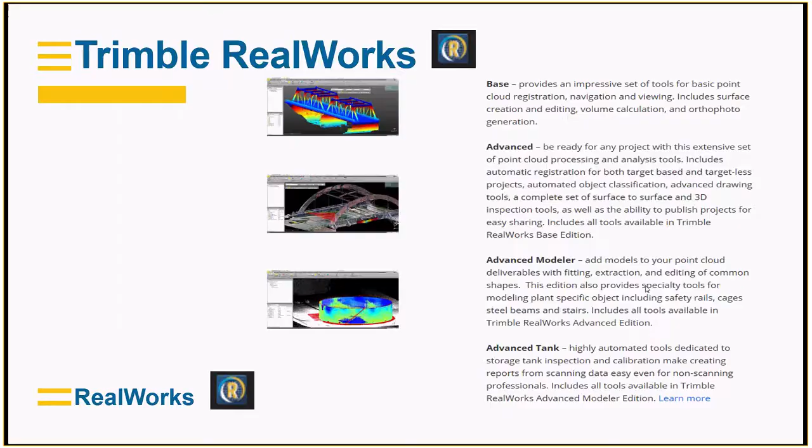So we'll jump straight into it and get into RealWorks. Some of you that were with us on the previous sessions will be familiar with this - this is the start page that we get when we launch RealWorks. It automatically puts us in this registration configuration, which is the stuff we went through the other day.

So today we're going to look at production mode, and some of the stuff we can do in here in the time allotted - we'll just touch on a couple of them and dig a little deeper into some of the different tabs we have available to us here.

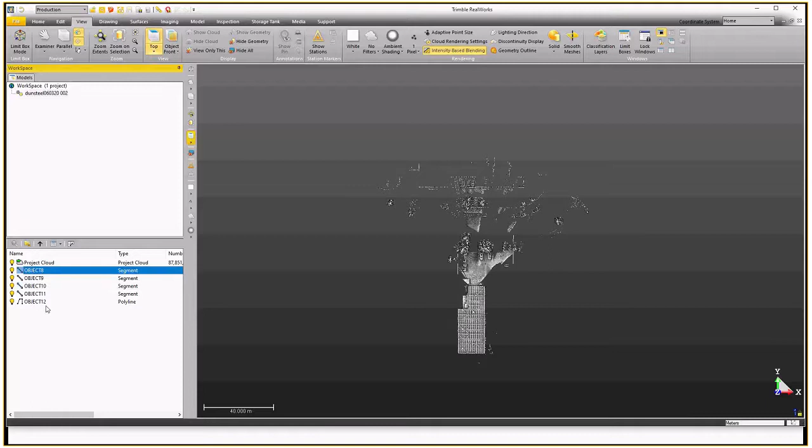So I'll just open up a project here, and I'm just going to delete these.

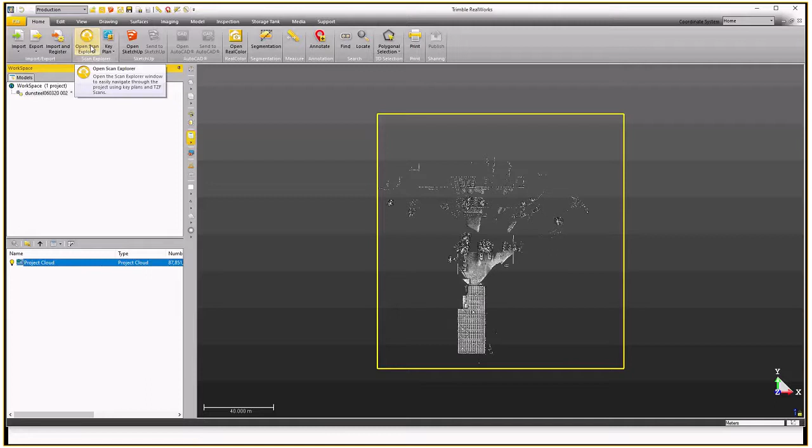So in this Home tab here, we import our data obviously. Moving across from left to right, we have this Open Scan Explorer, which is a plugin for Trimble RealWorks that's very handy for extracting some of the deliverables we've been talking about. When we open Scan Explorer, it takes us into this station view with an image overlaid on our point cloud.

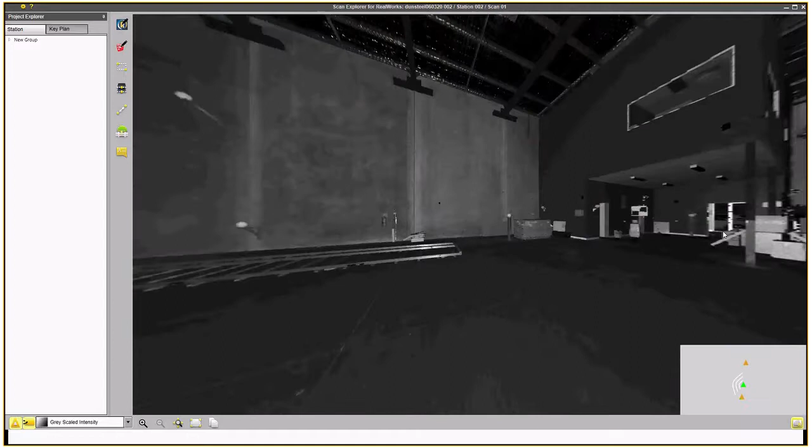We can skip between stations, a familiar workflow that we've seen in TBC as well. There are a few differences in here though - these are all our stations. In here we can create entities, line work and models and the like into RealWorks. We can also create them into SketchUp. The rest of these tools are more for extracting data from the cloud, but these top 2 we'll just have a quick look at today.

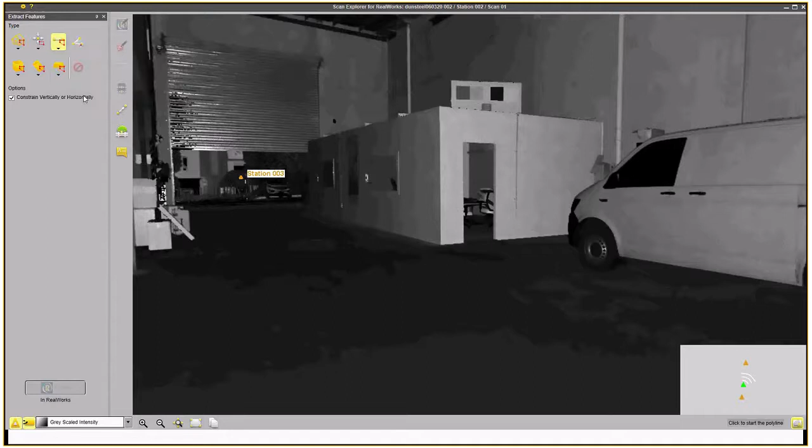So in RealWorks firstly, we have all these different tools available to extract different objects. One of them is this edge extraction. If I select that and then simply pull a polygon around the edge of a particular room in this case, and create, it'll automatically create the line work for me.

If I jump back into RealWorks, the line work's automatically put back in here for you. So I can extract the roof and the floor and all the rest of it, and export that line work into CAD and tidy it up accordingly, extending and trimming all my line work that way.

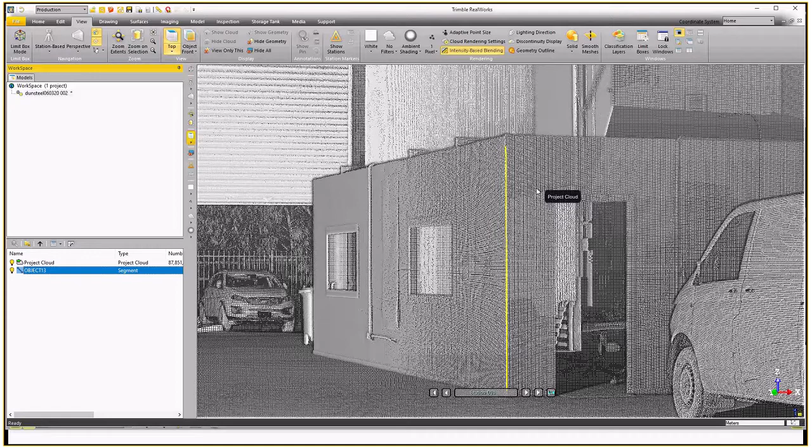Back into Scan Explorer, we can do some others here if we wanted to, and so on and so forth.

We have some other tools available here for creating points and also just basic polyline drawing tools. We also have some basic modelling tools in here, which I'll have a closer look at when we go over into the SketchUp entities mode.

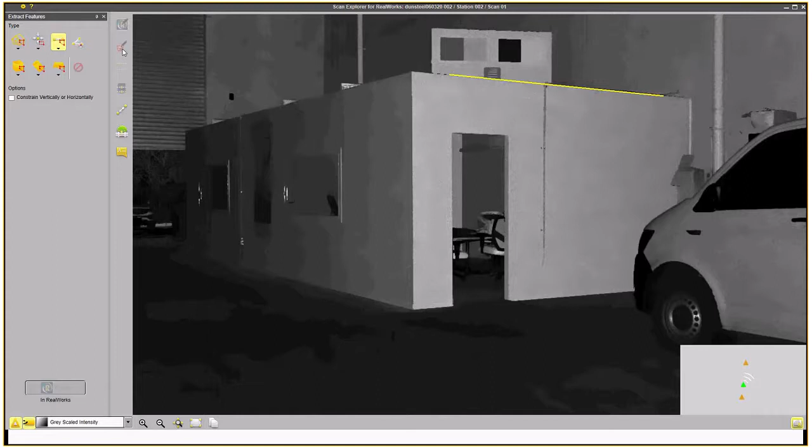So I'll jump over into there now. If I click on this SketchUp icon here - you'll just have to bear with me because of how this is presenting on my screen, I haven't got all my icons available to me. So I should have SketchUp - there it is.

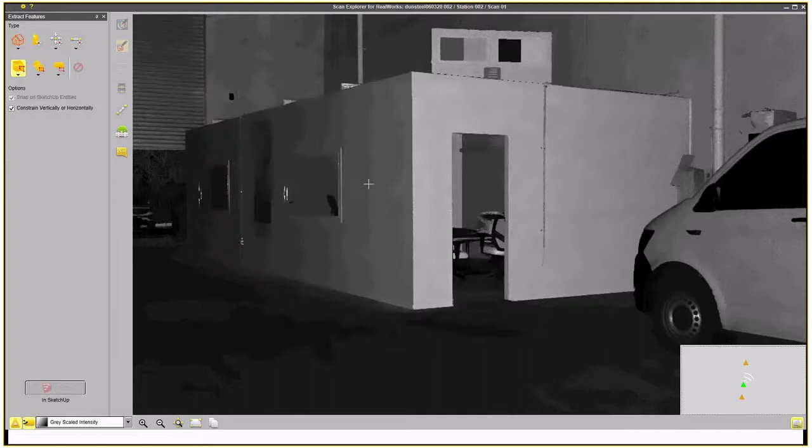And so it'll take us into SketchUp. This is the new scan extension tools up the top here, which I haven't had much opportunity to play with as yet, but I'll come back into here.

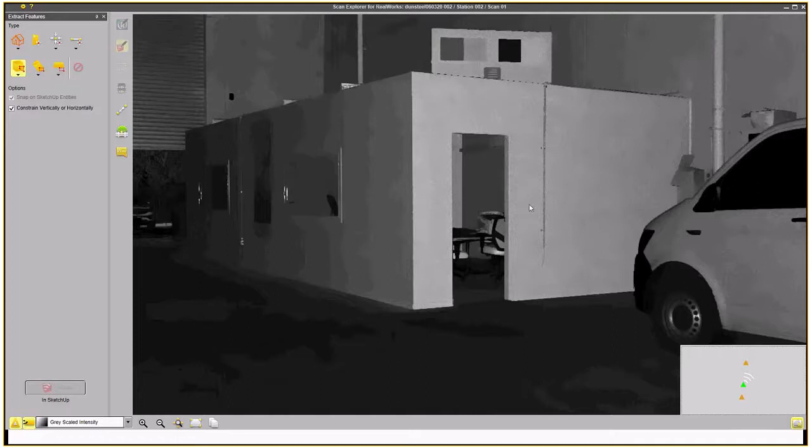So if we wanted to extract features into SketchUp, one of the nice tools in here that wasn't in the RealWorks workflow is this one: walls using 2 face points. We can pretty quickly model this warehouse using this tool, do a basic modelling. If I select the floor and the roof and then simply click around the walls of the building - I can't see that wall, so I'll just have to step up to station 3 and keep going.

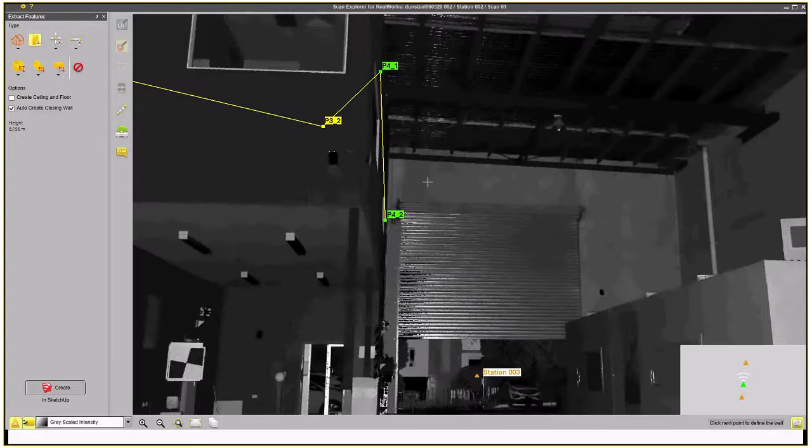And I'll come back to station 2, it's a bit easier to see. And keep going like so. Okay, so if I create on that now, and I'll go back to my SketchUp.

Okay, we now have our warehouse model without the roof and the floor. There is an option to add them to the model in SketchUp.

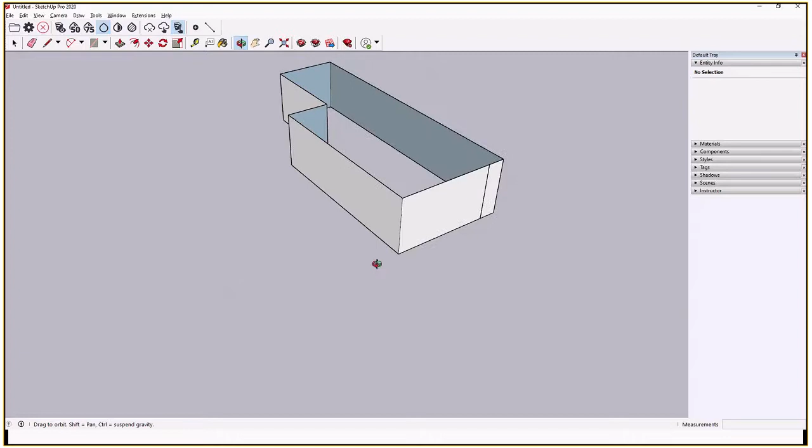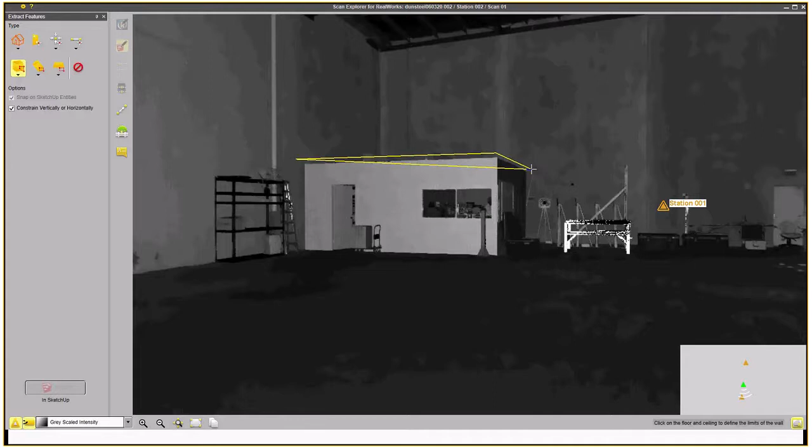So if I jump back over into Scan Explorer, we can also model these rooms pretty easily. So this select and extract box tool here with the polygon option - I'll just roughly select it around here, and create.

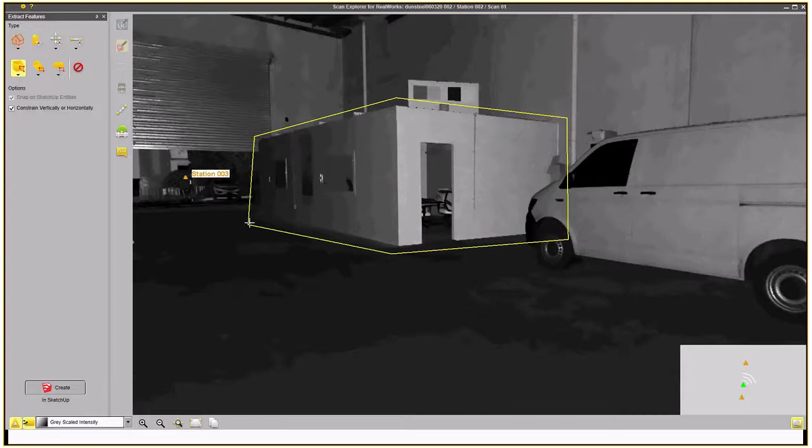And then I'll come back to our other training room, which is the one that I'm sitting in talking to you guys right now, and grab that one and create that.

So now, if I come back to my SketchUp, my training rooms are modelled as well. So there's all that, and then onwards and upwards from there with your SketchUp model. So there's all those kind of tools now. Well, they've been around for a while, but they have improved a lot from RealWorks into SketchUp. Okay, so I'll get out of there.

So basically, yeah, that's Scan Explorer. There is some other functionality here, as I said, with point extraction and measurements and stuff, but won't take up your time with that today. So we'll close Scan Explorer.

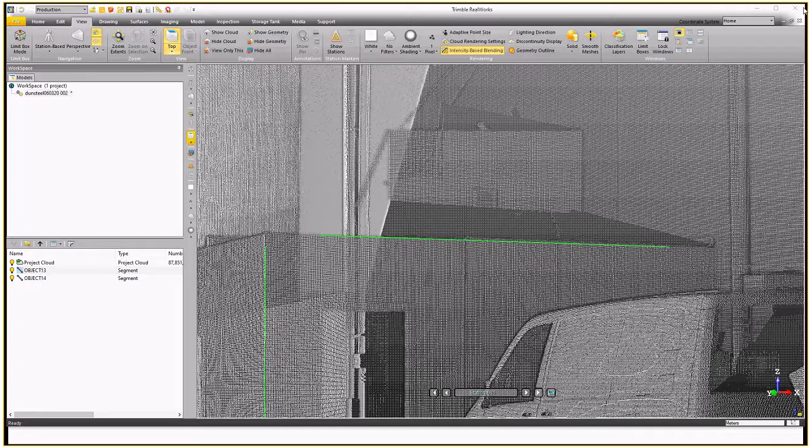The other is back in this Home tab. We looked at Scan Explorer and SketchUp. There's not a lot of other stuff in here. We can publish these projects, so much like your Clarity out of TBC, we can publish these projects out of RealWorks. It's an embedded Scan Explorer, a version of Scan Explorer that opens the data up and customers can take measurements. They can even extract data from the cloud in there as well.

So we're going to look at some of these other tools, drawing and surfaces and inspection. I'll close this project and open up this one here.

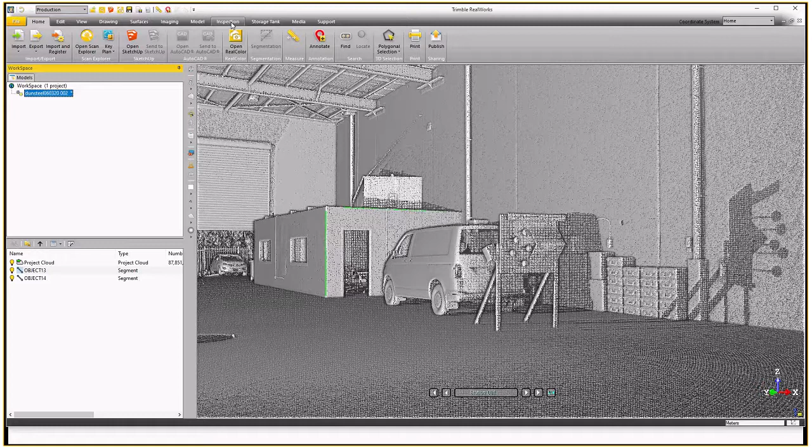Okay, so this was a data set we were looking at the other day when we were doing the registration stuff. So this data is now registered, georeferenced and all the rest of it. So we'll run through a few of these tools in here.

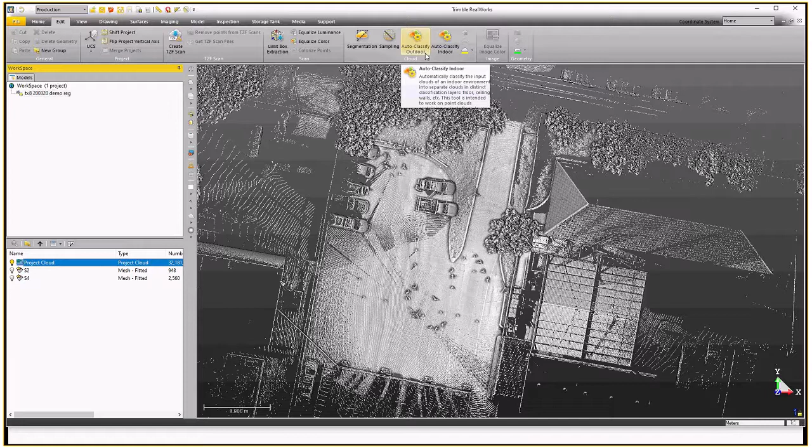First one I just want to have a look at - actually I'll just quickly show you this before we jump in there. In the edit tab here, we can rotate and shift our project and a lot of the common type functions. We also have these auto classify tools here, much like you do in Trimble Business Centre with the auto classify regions. We've got the same kind of functions in RealWorks. Probably auto classify outdoor, same kind of thing. It'll split the clouds out into different layers over here in our workspace, and indoor - floor, ceiling, walls, etc.

And we also have the segmentation and sampling tools, which you'll see me using a little bit over the rest of this presentation in other tools. They're probably the most common functions in there.

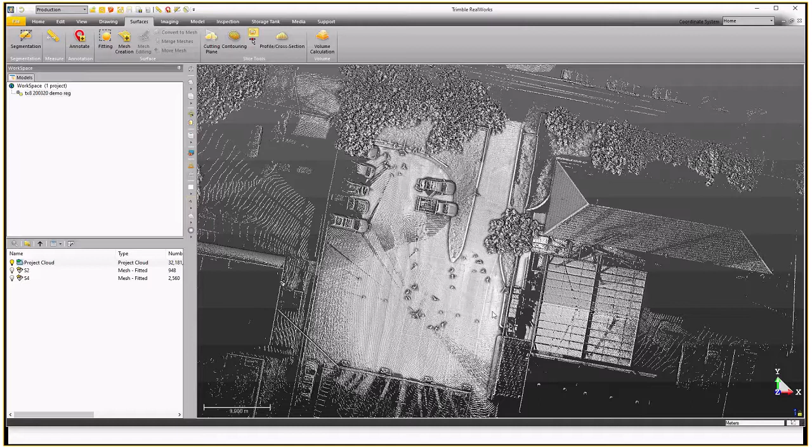So we'll jump into surfaces. And in here we want to create a mesh of part of this car park. That's what we're going to do here today. So we hit mesh creation.

So a lot of this segmentation and sampling tools, as well as living externally, they live inside a lot of the tools. So you don't have to do all your segmenting and sampling and then go, oh, okay, I'm right now, I'll go and mesh it. You can actually just do it inside the tool, which is nice and handy.

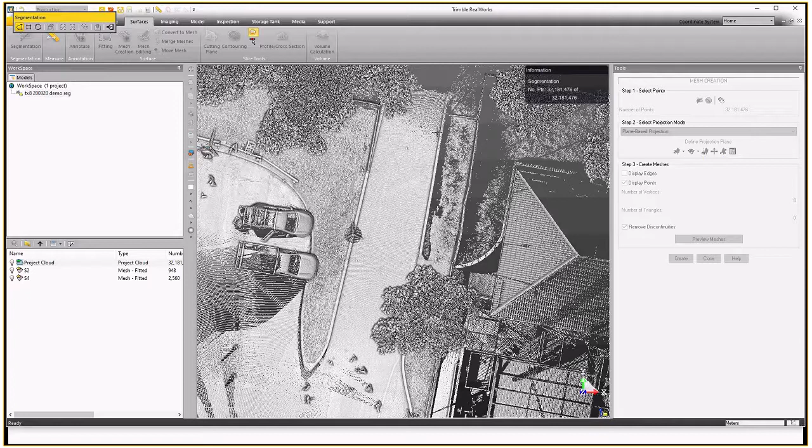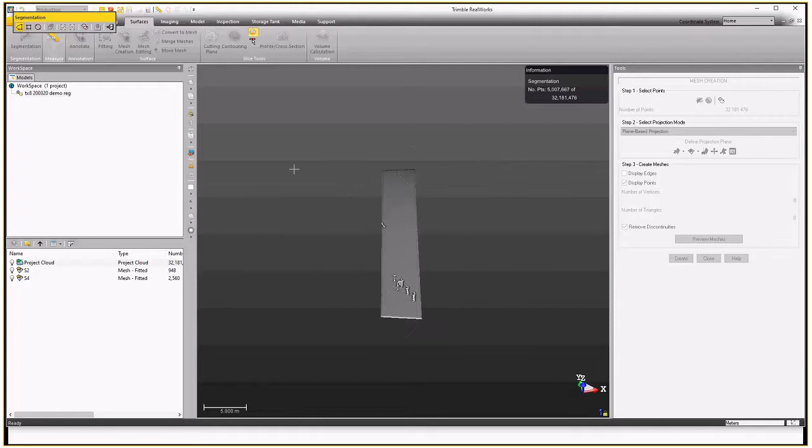So I'll just select part of this point cloud, which is the ramp coming down into the car park. Something like that'll do - grab what's inside there. And then I'll just basically, because we've got some other tools that make this a bit more automated for us, I'll just grab that, get rid of some of it. Okay, so we're left with people and a leg of a tripod there on the side of the road and a few bits and pieces.

So now we've segmented out the point cloud we want to work on. We're going to sample this and tidy it all up and dumb it down basically as well, so we can just have a nice smooth mesh of the road there.

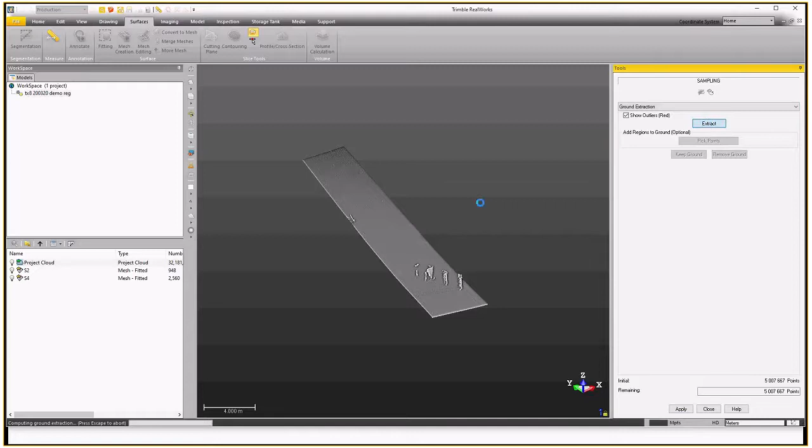So the first sampling I'm going to run is just a ground extraction. Okay, that'll get rid of a lot of this stuff. So if I run that, okay, you can see it highlights a lot of the little people and whatever else we've got on the road here in red. So we'll keep the ground, but you'll notice that far from perfect. There's still bits and pieces of people's shoes and whatever on the road, and you see that with car tyres.

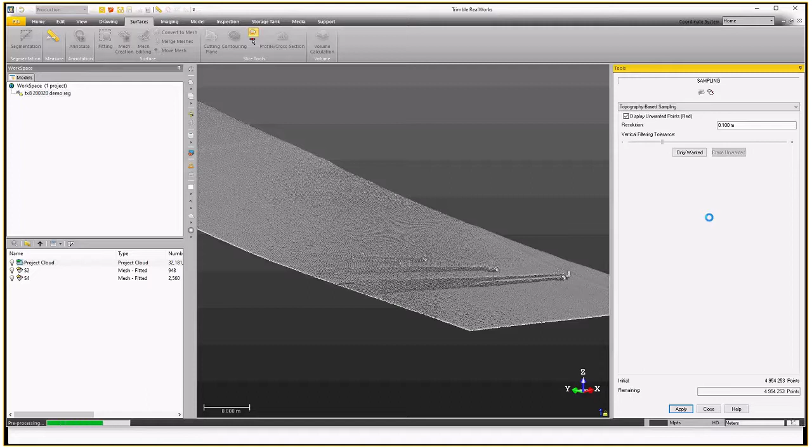And the like. So in RealWorks, we have this tool called topography-based sampling. What it allows us to do is basically bring down a vertical filter on the surface and highlight, set our own algorithm for the ground extraction. When you think about it, that's what it's doing. So it'll highlight in red what it's got there.

I usually like to take this down until it's just eating into the road surface, and then we've got 5 million points there. If we lose a few of them by sampling, it's not really going to worry us too much. I'd rather get a nice smooth surface here. So that's just starting to eat into the road surface there now. So I'm pretty happy with that.

So if I go erase unwanted, and we've now got a billiard table type road surface without all the lumps and bumps on it that we had before. And lastly, I guess we're going to do a spatial sampling on it.

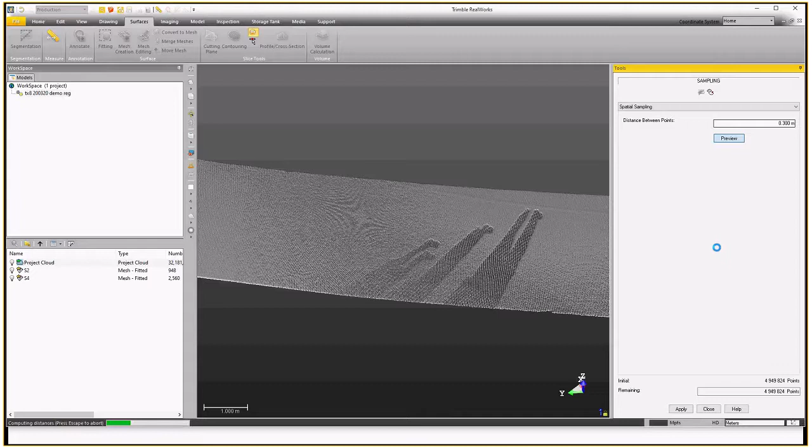So we don't need 5 million points, that's for sure. Probably a point every 300 mil will do us. So if we spatially sample that, okay, so sampled it down for us, we're left with 1,000 points after all of that. And we hit apply.

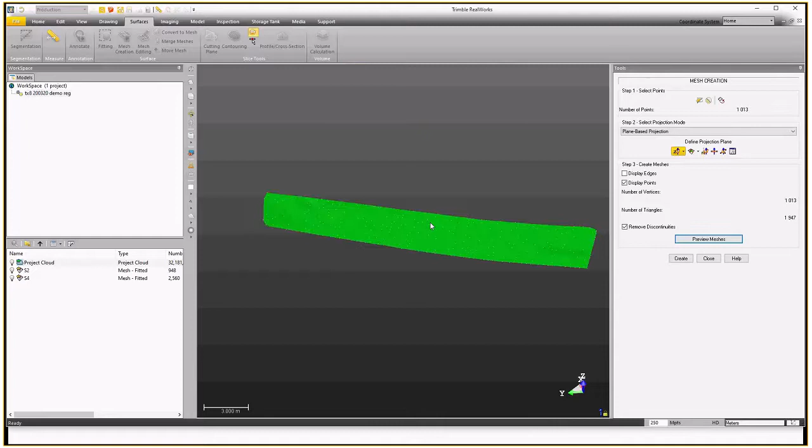And we want our mesh thrown down on this in the Z projection, which is right. So if we hit preview mesh, it's done. Okay, so we've got a nice smooth mesh there, no spikes sticking up in the air or anything gnarly like that. So if we hit create, close. Okay, we've now created our mesh on the ramp down into the car park.

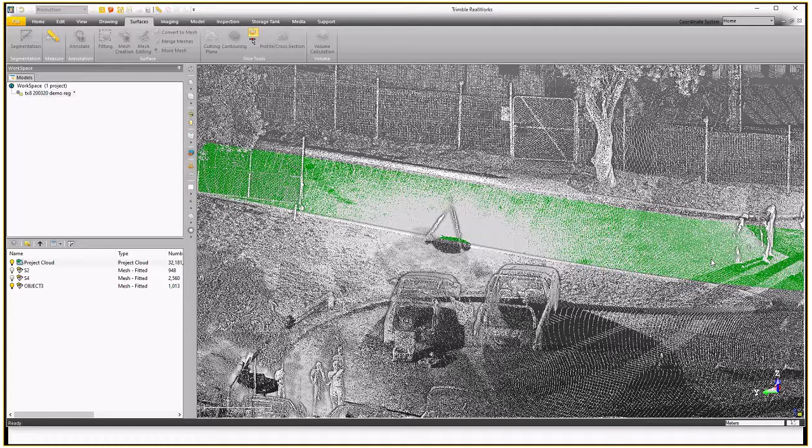So just a few other functions that we've got in surfaces to have a look at with the mesh. We've got mesh editing, which I won't go into here. It's basically tidying up your triangles. You can import break lines if need be and rerun the mesh using break lines. And a few other functions in there.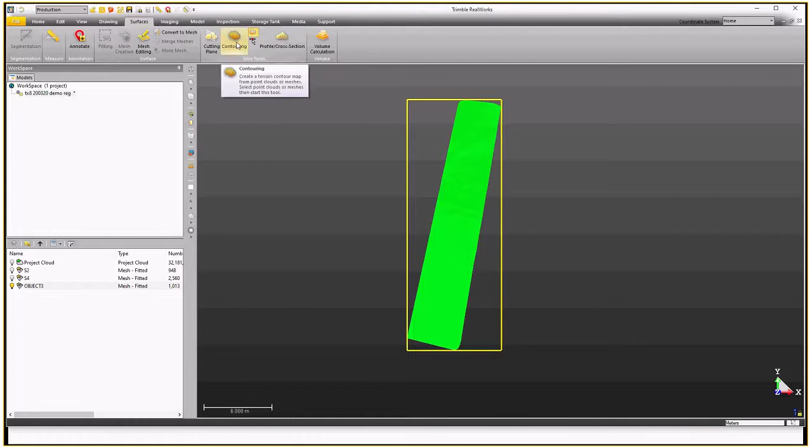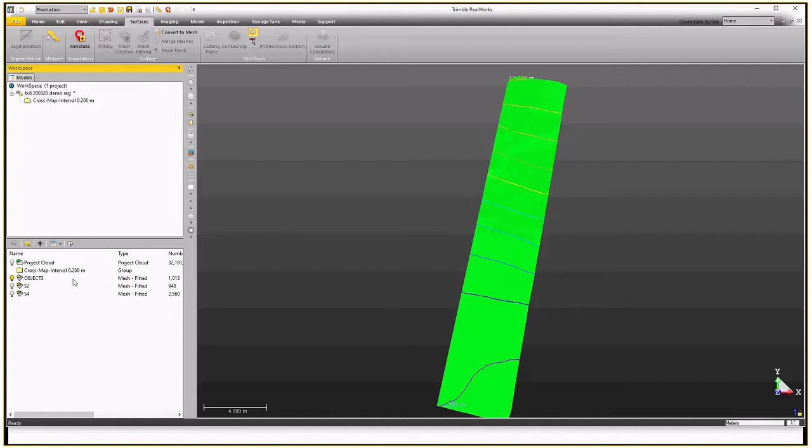So further to that, we have just a profile cross-section tool as well, which is pretty quick and easy. So normally you'd probably import a road center line or some kind of line work to define this, and then it'll just be in this drop-down menu. I'm just going to draw one.

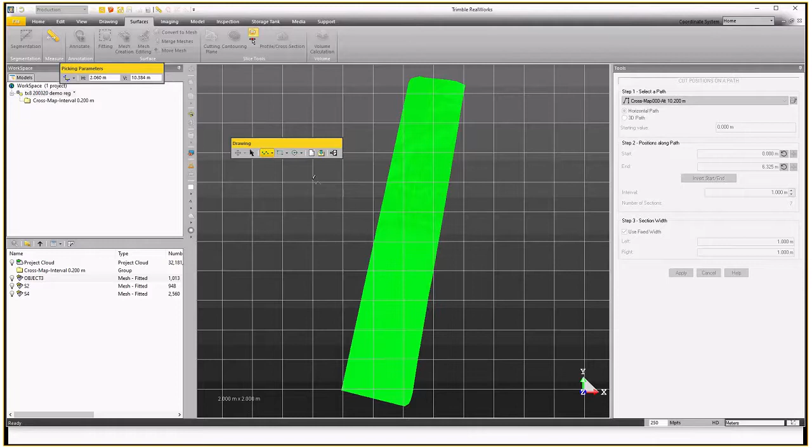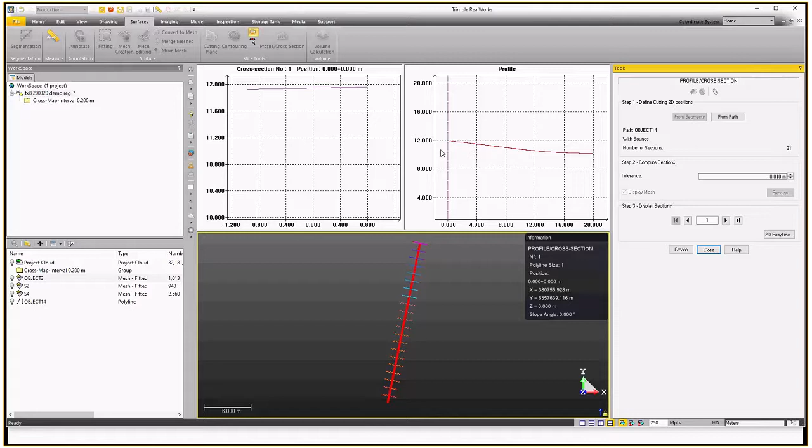And then start and end chainage, cross-section every metre either side. Apply. Preview. So here we have our profile, a long section, chainage 0, and we can step through every metre, checking our cross sections over here on the left, and then a 3D view down the bottom here.

Okay, so if everything looks okay there, we can hit create on that. And same kind of deal, we end up with another folder here with our cross sections, with our long section, and all our cross sections at chainage. Okay, so yeah, probably don't need to do too much more in surfaces.

That's basically it. While we're in this same data set, I'd just like to, one thing we get asked about a bit, is inspection tools, or comparing different surfaces, generating heat maps and generating sections between the maps and all the deliverables there.

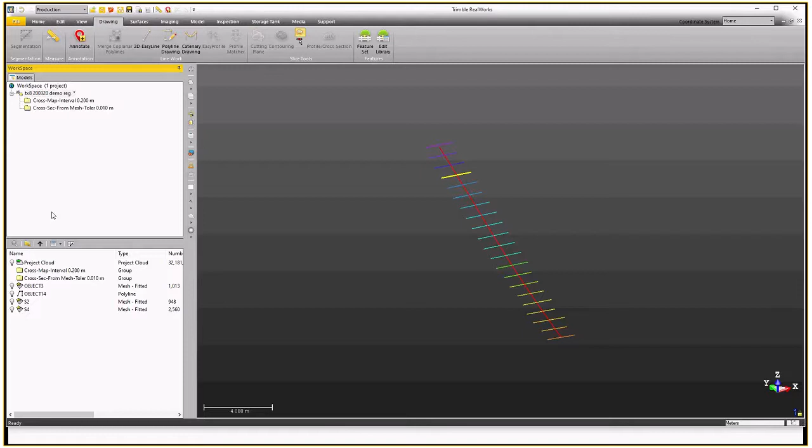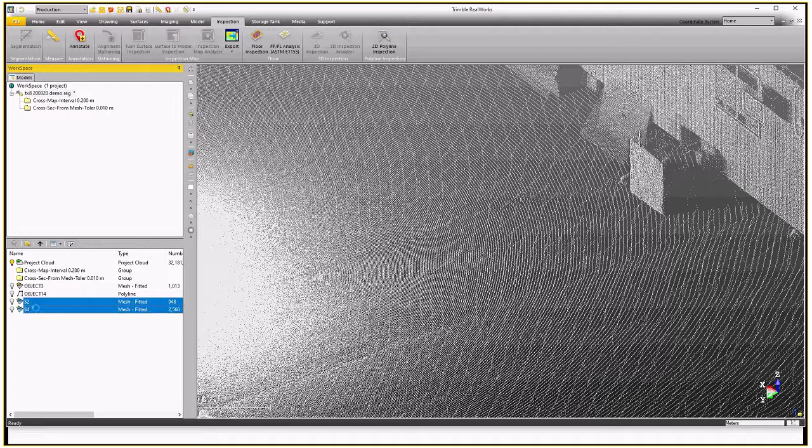So I'm just going to hide, put that back on, and I'm going to hide that. Right, so in here we have this inspection tab to do this. So we have twin surface inspection, surface to model, if you have a model, a design model or something that you can import. What I've done on this particular job, this was a demo that we did, and they had some boards up over in the corner here, and you can see that they've been moved from scan to scan. So they did that so we could show them how we can report on that basically. So what I've done is I've created a mesh on both of those surfaces, okay? And so we're going to compare them and generate a heat map, etc. If we select those two surfaces, this twin surface inspection tool now becomes enabled.

So if I select that, it brings us in here. Our red is our reference surface and our green is our comparison. If I want to flick those around, I can just toggle them the other way, and we'll have red as our reference surface. I'll turn off the green so I can define. At the moment it's saying I'll compare the two surfaces in the Z plane, which I clearly don't want.

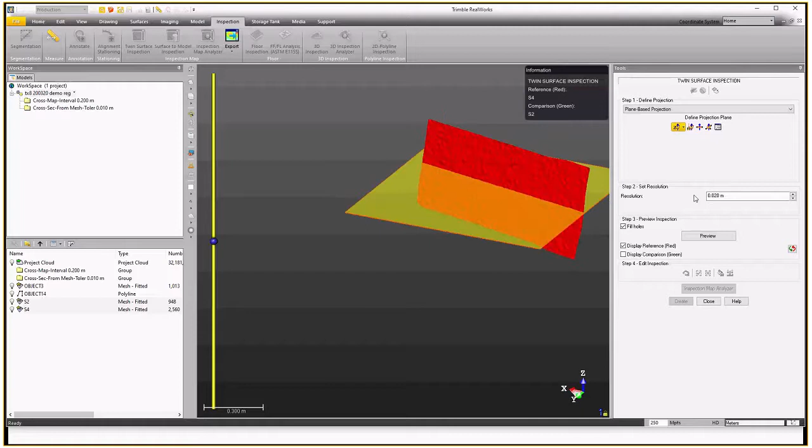I want my comparisons to be square to my reference surface. To do that, I can just define a plane on this reference surface. Now everything that I produce will be square to that, or I could have it square to my comparison surface if that's what I wanted. We're going to create basically a point every 20 mil over that mesh, and we're right to go.

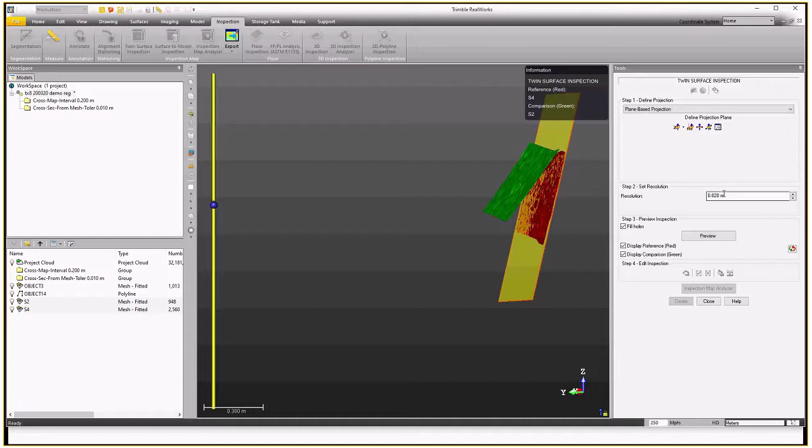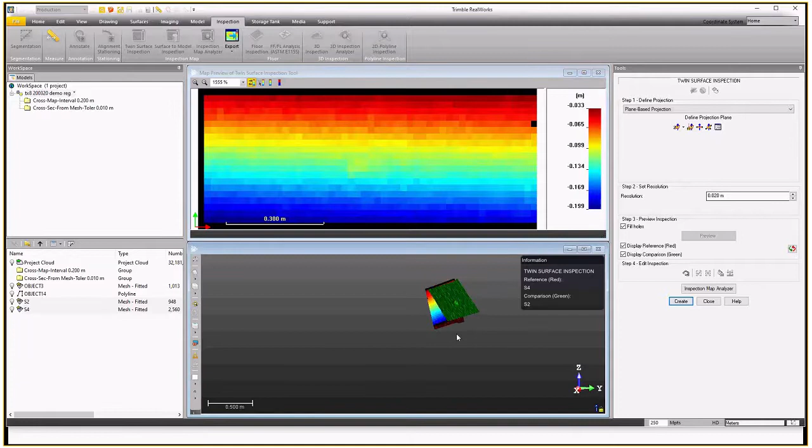So hit preview, and we get this kind of heat map visual here. With our colour bar down the side, we've got everything from 33 mil at the top down to 200 mil at the bottom, and we get the heat map thrown onto our reference surface down the bottom of the screen. So we can create this heat map over here.

But if we want to dig a bit further into this, rather than just creating a heat map, we go into this map analyzer tool. What this does is it creates sections through the heat map, so we can export them as cross sections. What I've done here is I've got a section every 50 millimeters, nominated over here on the right, up the reference surface, and you can see every 20 millimeters along that, which was the resolution that I set, it's sampling the spacing between the two and creating a cross section accordingly.

So I can create those. I can also run them vertically between the two surfaces, and I can step through them here and have a look at where I am, and once I've got it set up how I want it, just create. I can export them straight out, or I can create the cross sections so they live over here, and then export them out. This slider up the top, I can move it along.

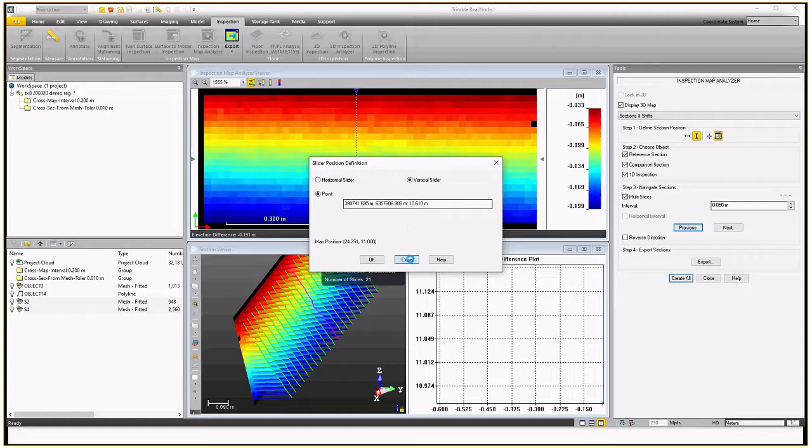But if you're, for example, doing monitoring work and you wanted to compare these results over time, you need this slider and therefore these sections to be set at the same position each time. So here I can simply type in the coordinates of where I want my 0, 0 to be each time, so I'm comparing apples to apples when I'm bringing in scan data and comparing it. So yeah, that's the inspection map analyzer.

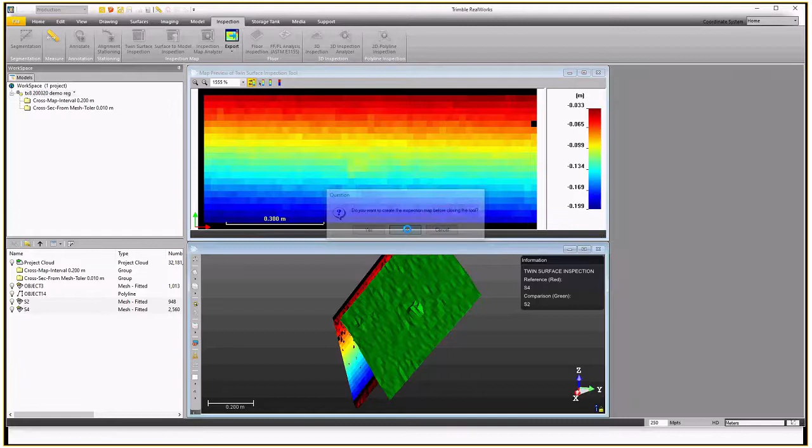In the inspection tools, we also have floor flatness tools, which I won't go into here today due to time constraints, but they're pretty straightforward. We put a grid over the floor, we can nominate tolerances, and it'll give us a heat map again, and also a grid showing the differences between the RL that we've chosen and the point on the, well, commonly slabs, and we can export a report as well for that. So they're the inspection tools.

Am I going time? It's 20 past.

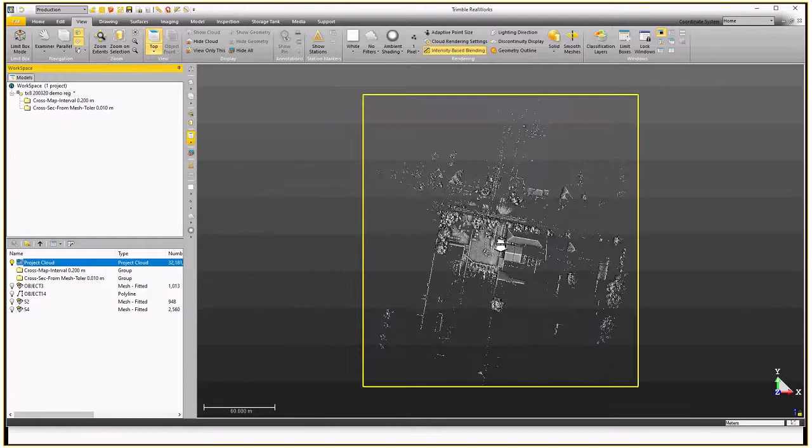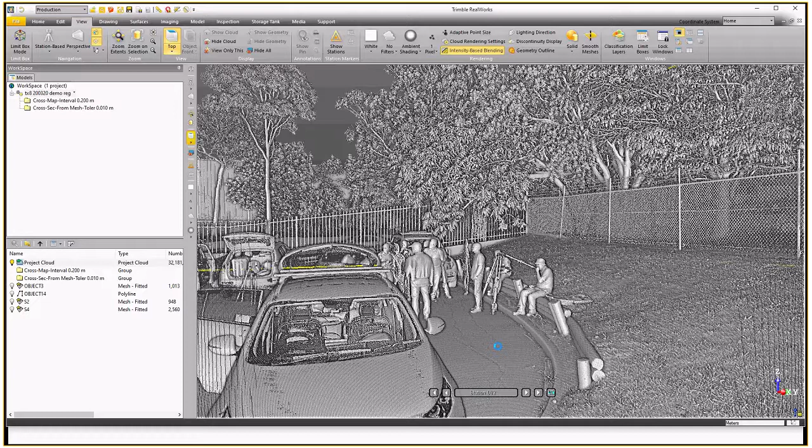Okay, so while I've got this data here, I just want to show you some of the drawing tools. So we've got some curb here. In drawing, with the polyline drawing tool, much like what they call smart picking in TBC, we've got the same kind of options here as well. We can just select anywhere on it, and it'll snap to the curb for me, or invert as we call it here.

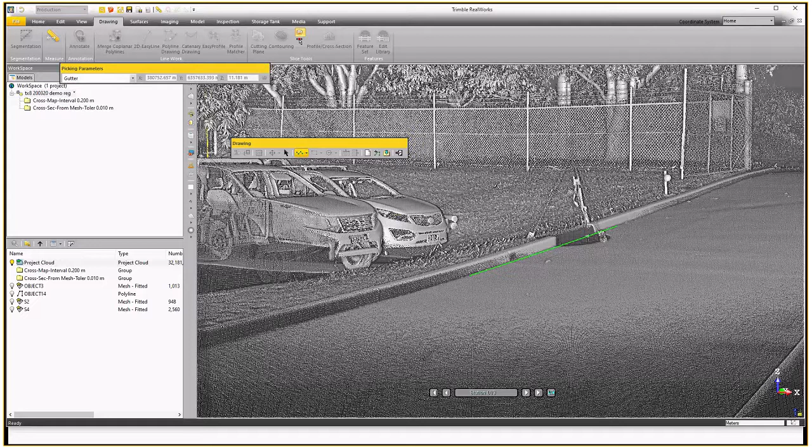And we can, stuff most of you guys have probably seen before. So we can create that, so on and so forth. So yeah, those kind of standard drawing tools are in there. What we also have in here, particularly good for curbs, is this easy profile tool. I'll just show you that.

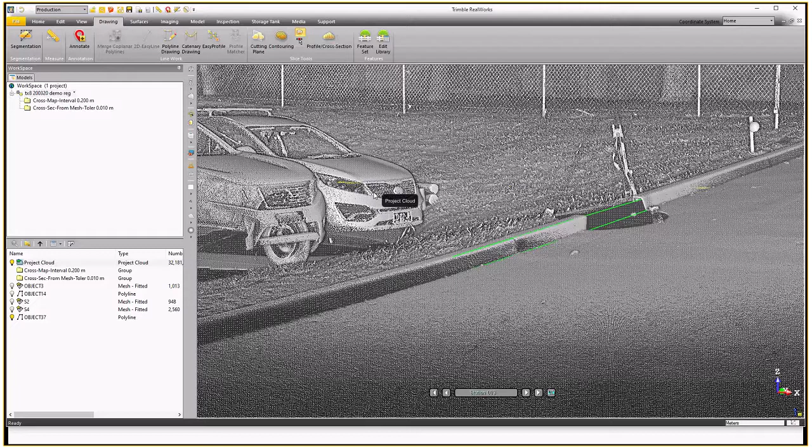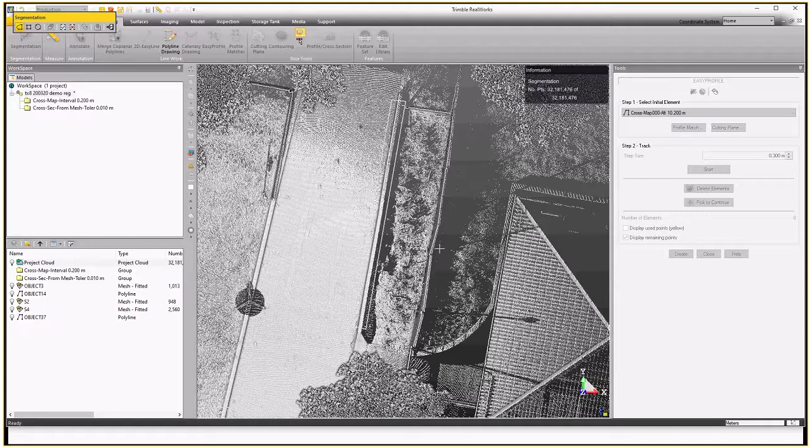So if we had a section of curb, and I'll look at this section here, we jump into there. I'm just going to segment out the bit of curb that we want. What this tool does is it basically creates multiple strings at the same time based on a profile that we give it for, in this case, curb. You can use it for anything, really.

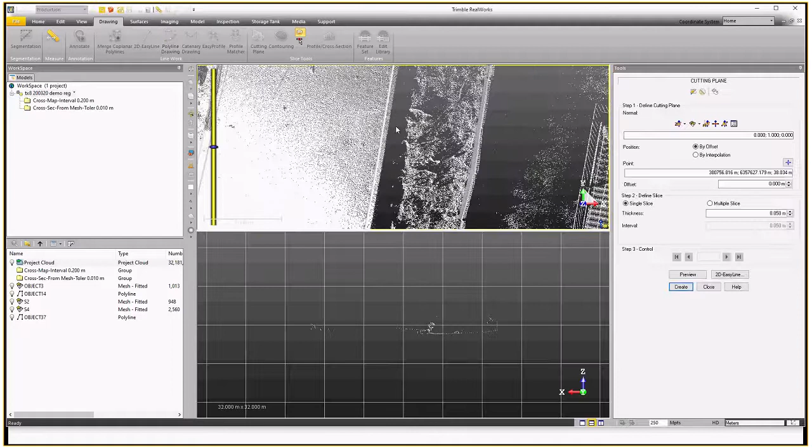So I've got the section of curb I want to string. If I go into this cutting plane, I'll just cut out part of the curb that I'm going to use to define.

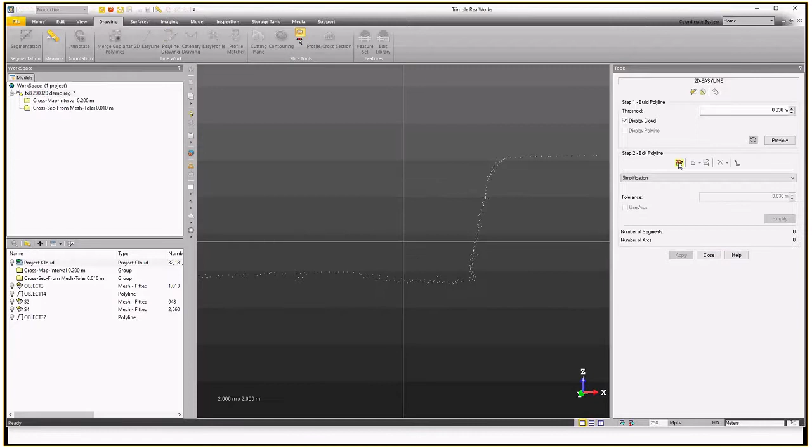You can also, in here, import design cross sections of curb and the like, and overlay them on the cloud and do it that way. Here I'm going to... okay, so it has figured out its best cross section kind of solution for me, and I'm going to come in here. I'm going to draw one, but as I said, we can just import once you've drawn them, or you've drafted them up in CAD or whatever you've done, and you've brought them in here.

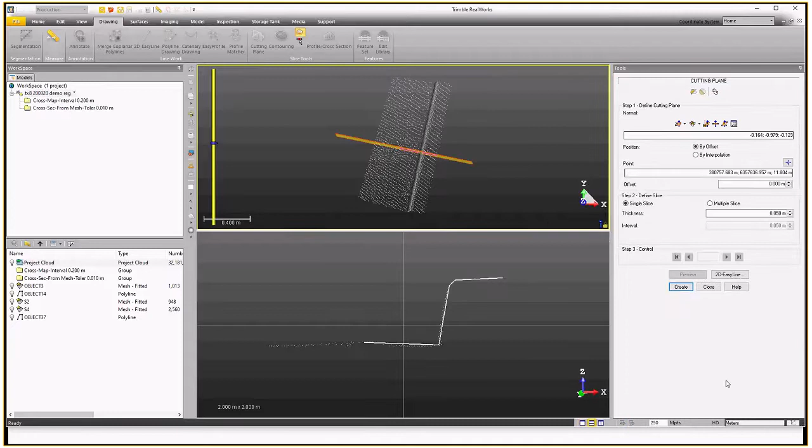Well, you only need to do it the once. You don't need to do this every time. Just for the demonstration, I do so. Create. Okay, so now it's plonked that profile down on the curb there for me, and I've told it I want to run this so it'll sample the cloud every 300 mil. So if I hit start on that,

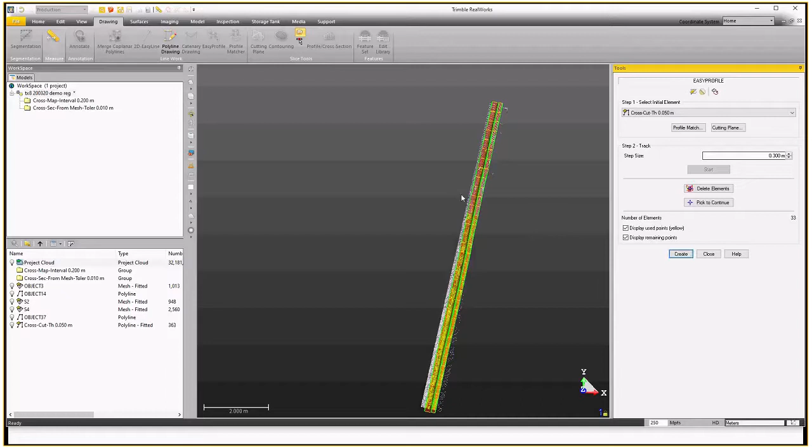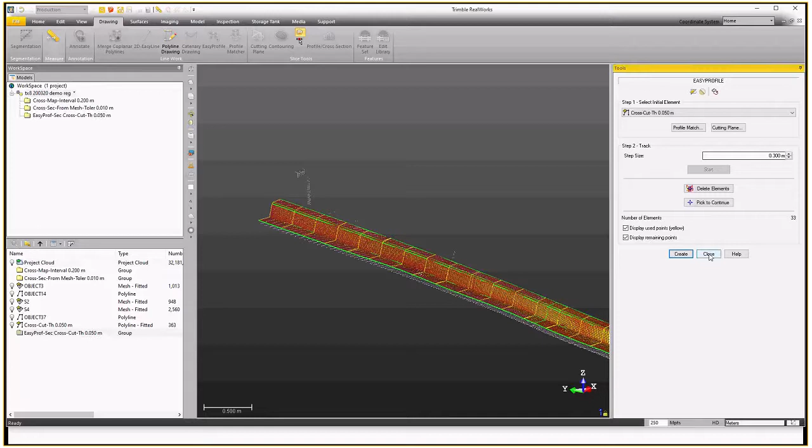okay, so this is only a small section of curb, but where it's really handy is on long runs, obviously. When you get to driveways and rollbacks and things, you've got to stop and restart. So you can see what it's done there. Every 300 mil, it's gone along and fit that profile that I created to the cloud. So if we create on that, close. Now if we come back out here, okay. So yeah,

it's the easy profile, and this one next to it, profile matcher, is where you have an existing profile that you want to import and overlay onto your curb and hit go, basically. So yeah, that's all I really wanted to look at in drawing. I think what we'll do is have a quick look at a couple of things in modelling, and then that'll probably do us. So I'm going to close this data set, and just going to open up.

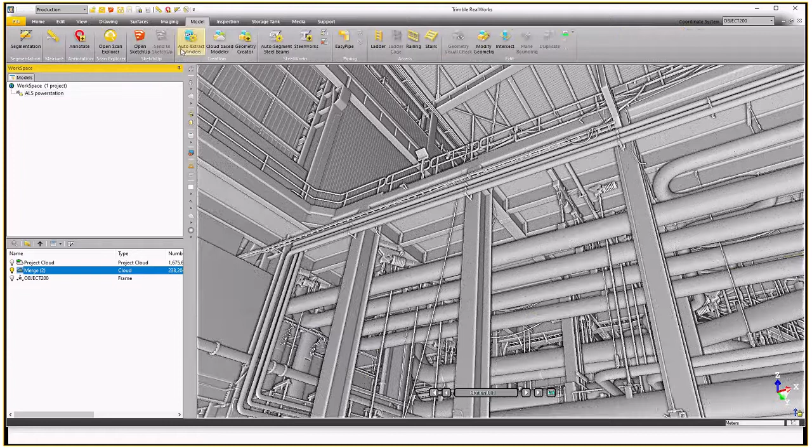Okay, so this was the power station that we scanned up at Lake Macquarie, and we've got the modelling tab here at the top with all these different options available to us. As you can see here, we've got a lot of pipe work and quite a number of beams and all the rest of it. But what we're going to look at here is modelling pipes.

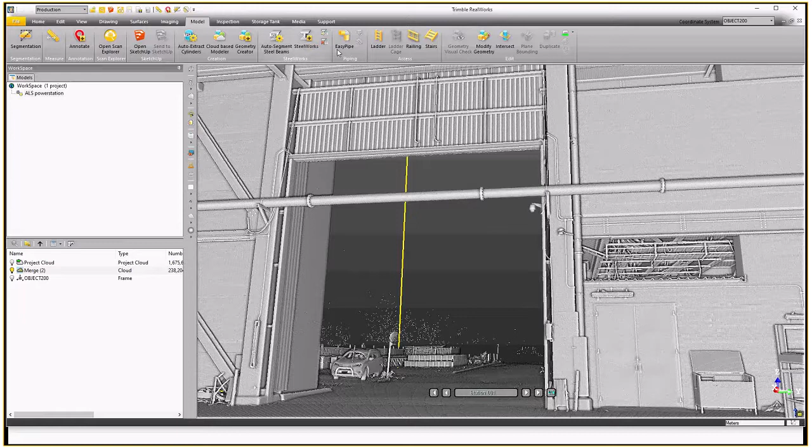There's a few different ways of doing it, but if we just wanted to model a section of pipe, we've got this tool here called EasyPipe, which, as the name suggests, is quite easy and straightforward to use. So if I select it and I hit extract on that, I can just select a section of pipe. It will calculate a diameter for me.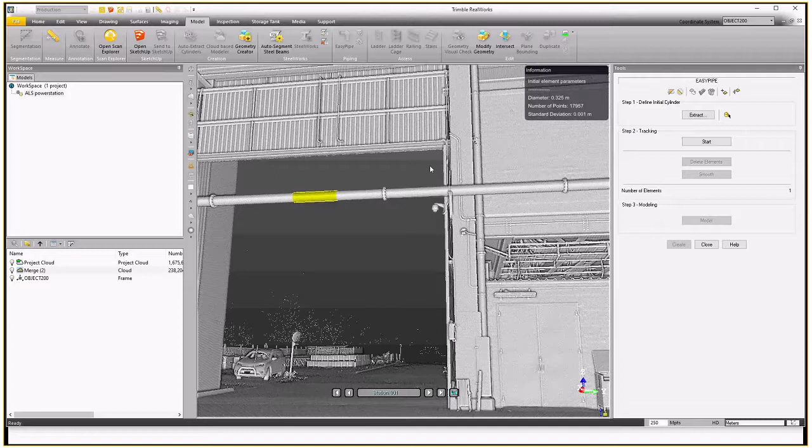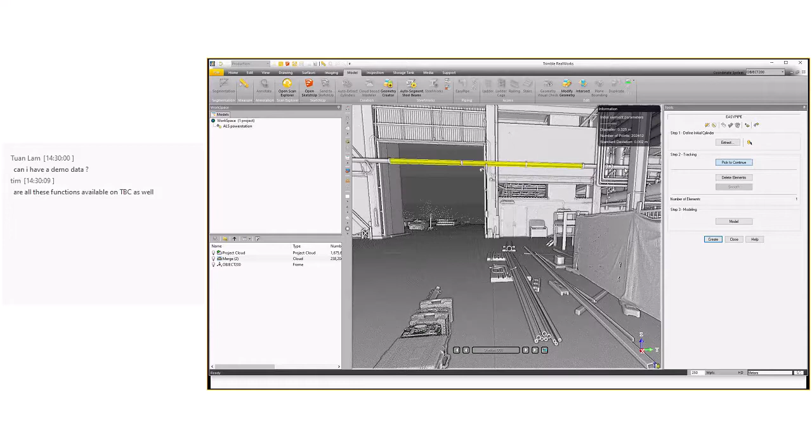It doesn't allow you to edit that at this point if you know differently, but after it's done its modelling, you can go in and change the diameter later if you're that worried about it. Pardon me. So once we've extracted that section, if we hit start on that, it'll model as far as it can until it hits these flanges, obviously, and then we need to tell it to keep going. Okay, so we can select further down the pipe and it will just keep modelling as far as it can find.

Okay, round bends, no problem. So in here now we've got a 90. So the next thing we do is we smooth it. All the different elements that we've just created, it smooths them. And then if I hit model, it'll automatically fit an elbow in there for me, best fit elbow between those two straights, and create. Close. So now I've got modelled pipe work. So I can go through and do whatever I wanted to do in here.

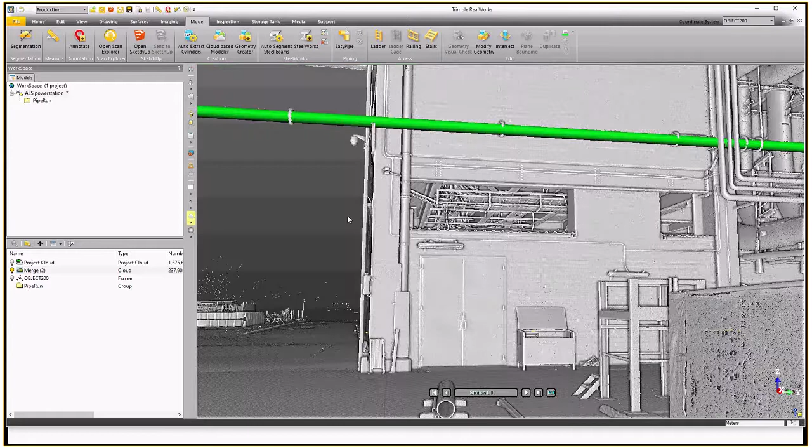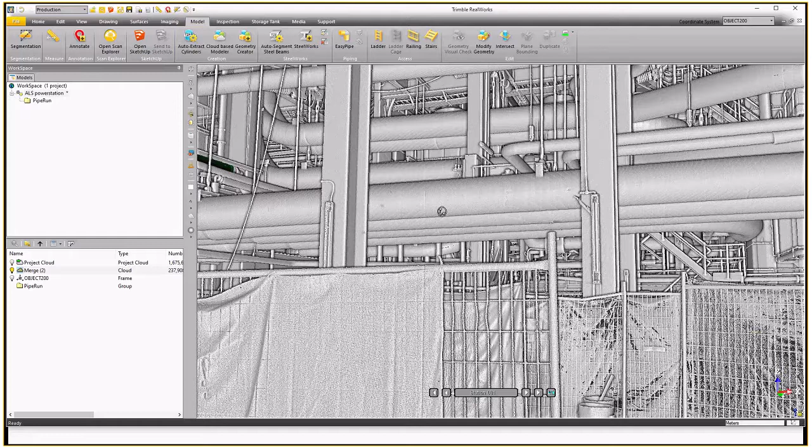There's a lot there, but it has got this auto extract cylinders as well, which works quite well actually, but it processes the full TZF scans, takes a while, but in this scenario, it's probably worthwhile. You get a lot of this pretty much automatically modelled rather than doing it the way I just did it. Whatever you think suits. So just lastly, the other one we get asked a fair bit about, as well as pipe modelling, is beam modelling.

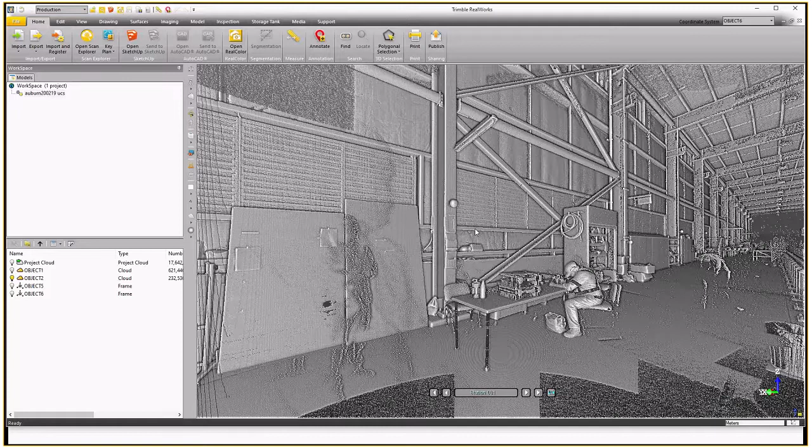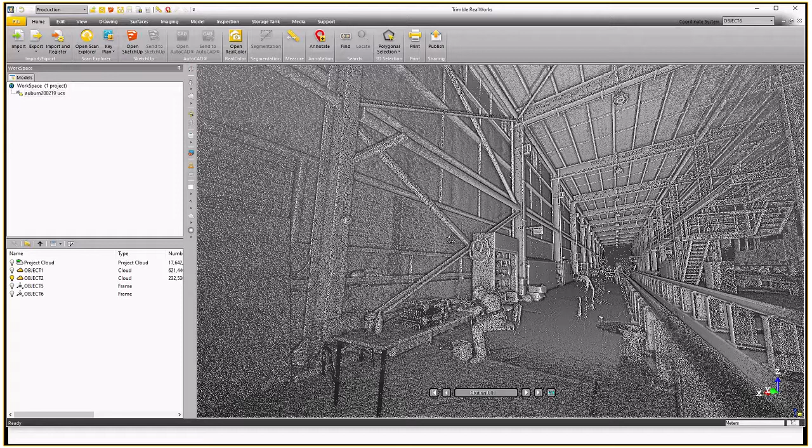So this is a rail yard where they bring the carriages in for repairs and stuff out at Auburn. So if we jump into the modelling tab here, I'll select cloud. We've got these Steelworks options. So we're going to model some Steelworks. And firstly, I need to just segment out part of a beam so we can fit a beam cross section to it, and then from there on we can duplicate that to all the other beams. So I'll just select that section of that beam there.

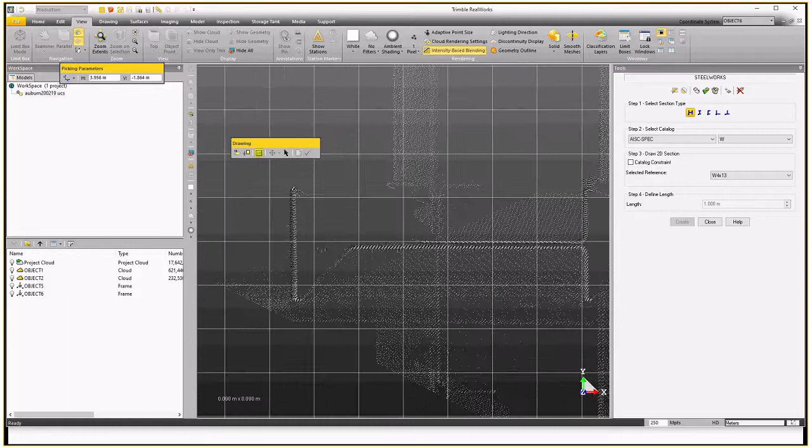Okay, so we've got our beam. So we have H beams and I beams. This is, in this setup, an H beam. We've got a couple of Steelworks catalogues loaded in here. I know this particular beam lives in this other catalogue. So what I'm going to do here, and create it.

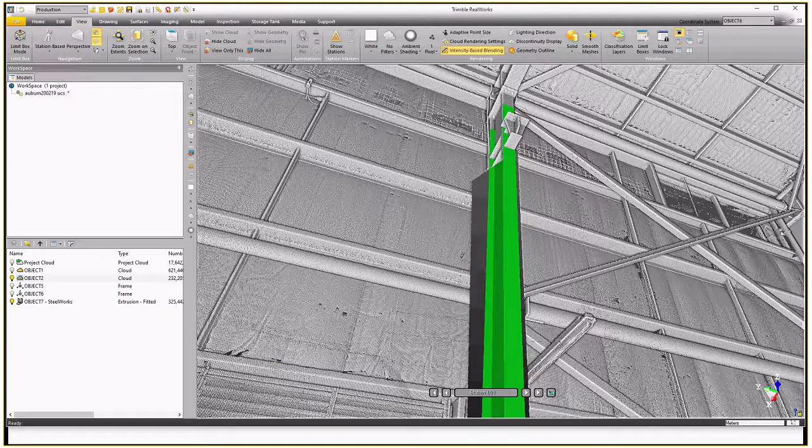So now, if I jump back into my station view, I've got a partially modelled beam. I just need to select that now and modify geometry so I can drag this to the full. I can only sample part of the beam. So we've created our first beam.

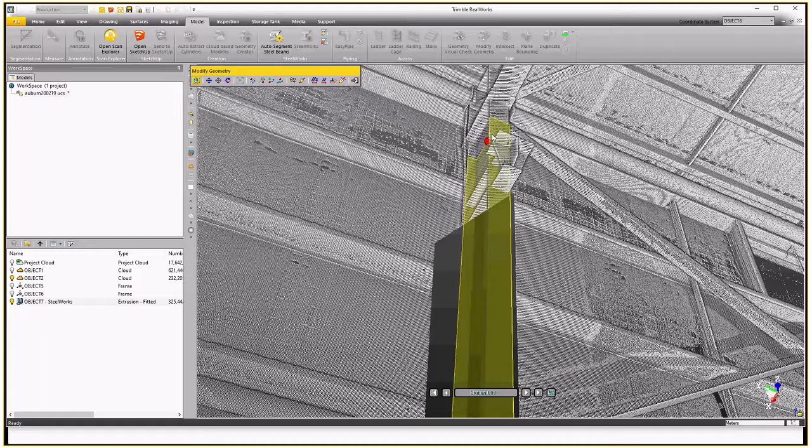Now for all these other beams, I had a bit of a cheat before we got on. I measured between these beams and they're basically 8 metres. I've also set this job up on a UCS, so user defined coordinate system. So the y-axis is running, and on a lot of these jobs it's a smart thing to do because it allows us to duplicate and shift data along the axes, which is a nice, quick, easy way of doing it.

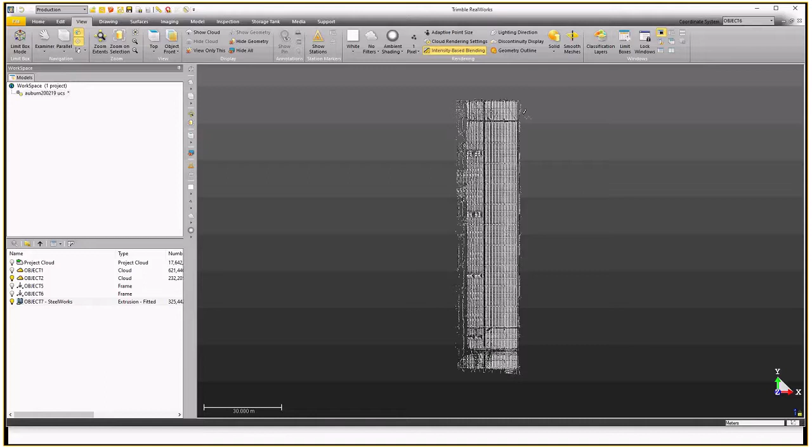So if I come back in here and I select that beam, I'm coming back into the modelling tab and I can duplicate it. And I want to duplicate it along a line. And I want it to be along the y-axis, and I know there's 9 of these beams running down that way, and they're at 8 metres. Okay, it's gone the wrong way, so I'll just invert. So they've now whacked onto all those beams going the correct way, and I can create those.

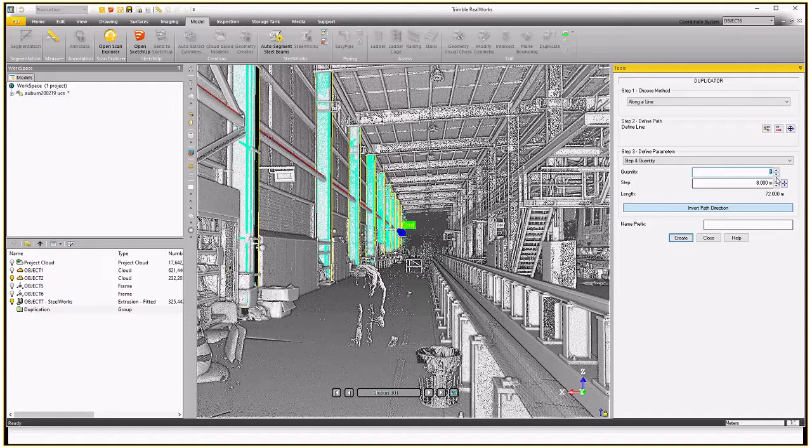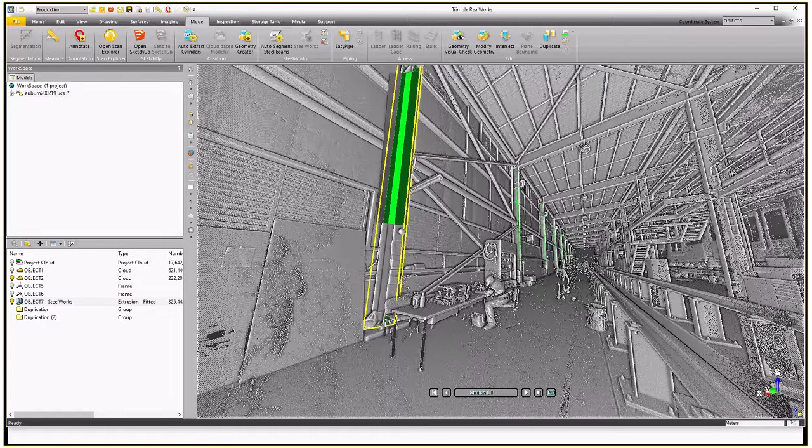Okay, I've also got two that I want to do the other way. So, yeah. Okay, and so I can pretty quickly and easily then duplicate these beams along the x-axis, to snap onto these and so on and so forth. It just kind of gets exponentially quicker once you've modelled one beam and then you've modelled a row of beams. You can step through the building pretty quickly and get your basic beam modelling done. So that's the modelling tab.

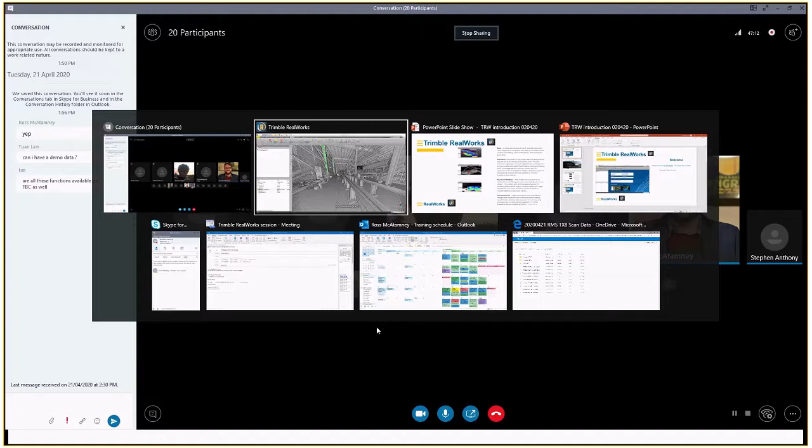Just to add to this while you're doing that, Steve. The difference between the two packages really is RealWorks is to get you that 3D model to essentially go to something like Revit and those sorts of things, whereas TBC is more your 2D outputs for design and that sort of thing. In TBC, we can't really create 3D models, so it's more that 2D line work that you're trying to get out. And in RealWorks, it's that 3D aspect, but it doesn't have that 2D. It has a little bit of the 2D component to it, but it doesn't do it as well as, say, TBC.

So the two packages, while there is a bit of overlap, there is not a full overlap for the function between the two, due to the fact that they've really got two fairly distinct outputs at the end, and that's sort of the way that we want. So if you're wanting 3D models, then go through RealWorks, and if you're wanting 2D design work and that sort of thing, then go through TBC, and that would be the best way that I would explain the two of those. Yep.